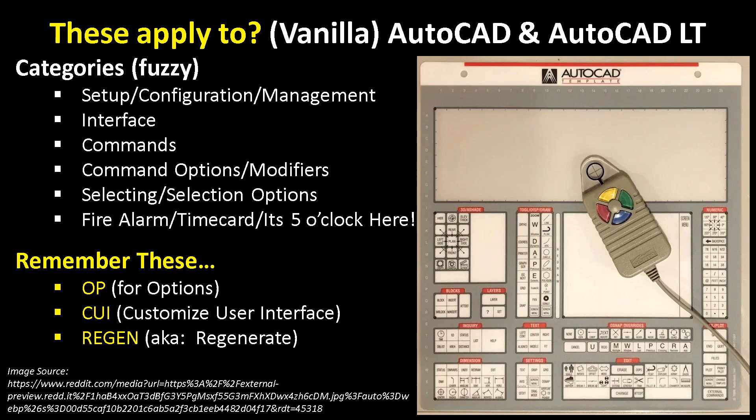And 10 extra points to anybody who can name what the picture is on the right, which, based on the previous poll question, I say the majority of our audience is going to get it.

All right, so let's get into the demo. There's a lot to cover, and I'm going to try to cover everything as best I can. I may move a little too fast to get it all squeezed in, and I may have to omit an item or two to fit us inside the hour, but there's a lot. So the first thing I want to talk about is the setup, configuration, and management aspect of it.

One of the things that comes up, not as much now as it used to, is arc and circle smoothness. You'll notice as I zoom in on some of these arcs, instead of looking smooth and contoured like they should, they're very jagged. If I zoom in on this one, it's a very jagged display. There's a couple of things that can clarify or rectify this situation.

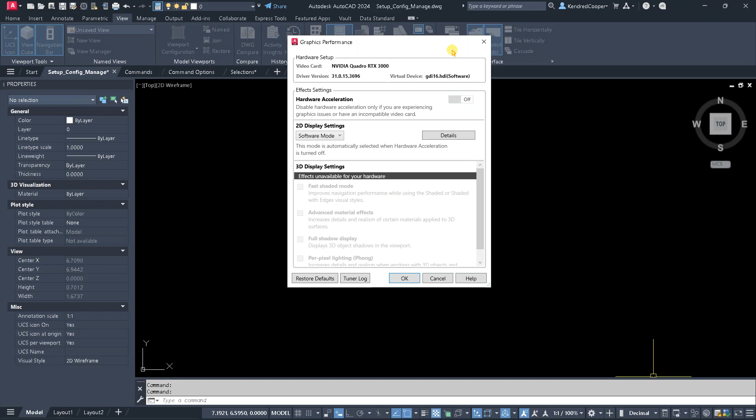One of the things is the graphics acceleration, or hardware acceleration. So if I go to graphics performance, I can turn on the hardware acceleration, and for the most part that will circumvent this situation. However, we've seen on some of the Intel cards that come with a lot of laptops that it tends to cause issues. The Intel cards are not a very good card to run any kind of CAD software on, so turning that on sometimes can cause problems.

So there's one option, but it may not be applicable. The other option is in the AutoCAD options. A couple ways to get there: OP and enter will take you to the options, you can also right click in the command line and go to options, or up in the application button at the bottom you'll see options. Any of those will get you there.

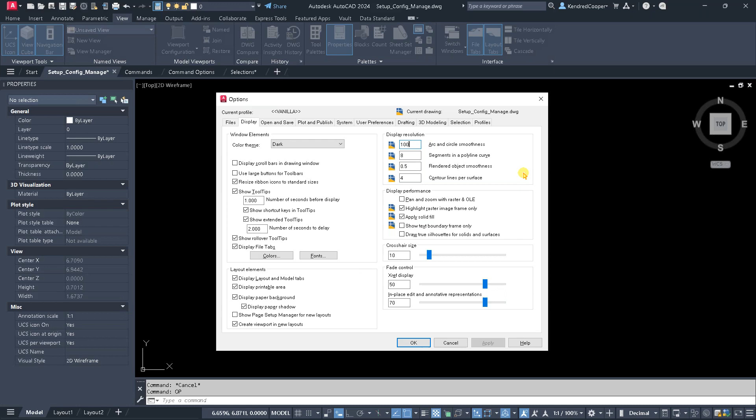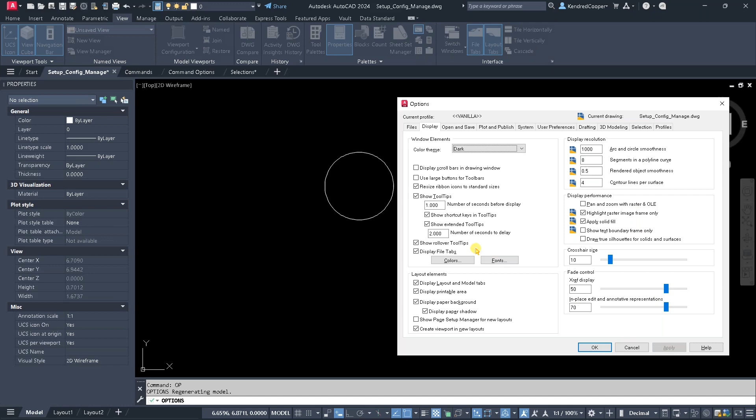So in the AutoCAD options, on the display tab, upper right-hand corner, there is a value for controlling arc and circle smoothness. The default for this value is 100, and 100 gives you what you see on the screen, the very jagged circle. If I change this to 1,000, or even as high as 10,000—I'm not sure if there's a limit, I've never gone higher than 10,000 or had a need to—even going up to 1,000 and hitting apply, you'll notice that circle smooths out tremendously.

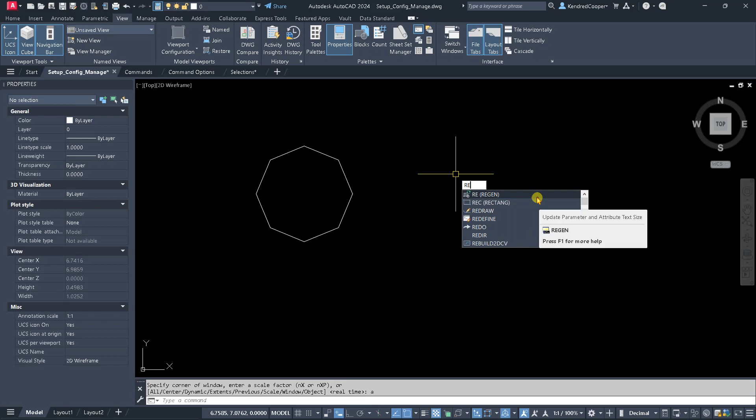So that's one option you might want to look at if you cannot use hardware acceleration. The other option, if I go back and tweak that down to 100, when I zoom in, the other control you have is to use the REGEN command. RE is your quickest way to get there, or you can type out REGEN. What it does is regenerate the graphics, and based on your current zoom level, it runs that smoothness count, that 100, at the current zoom level. So when you're zoomed in closer, you're going to have a smoother arc.

Zoom out and run a REGEN, it'll get jagged again. So there's a third option to tweak that, control that, and change it.

Something else to look at: let's say we're setting up our template, going with a new template. Maybe we've got 10, 15, 200, 2,000 drawings out there with various settings scattered around, all different. We're going to unify into a common template. Well, how do we get all these settings from other drawings into this template? What's the easiest way to do that?

Various ways you can do it, but probably the easiest is using the Design Center. On the View ribbon tab, on the Palettes panel, the clipboard icon is the Sheet Set Manager. To the left of that is the Design Center palette. The first time you launch it, it's a little slow, but after that it pops up really quick. The Design Center gives you a Windows File Explorer interface, so you can browse locally, on a network, wherever you need to look.

You can find a drawing, a specific file, and on that file you get access to some of its contents, such as the various blocks it may contain, or different dimension styles, layers, table styles, text styles, you get the idea. If I look in this particular drawing I'm working on, the layers I have are only center lines, column pillars, and dimensions. If I look at the various blocks, I only have two blocks. There's nothing else in there.

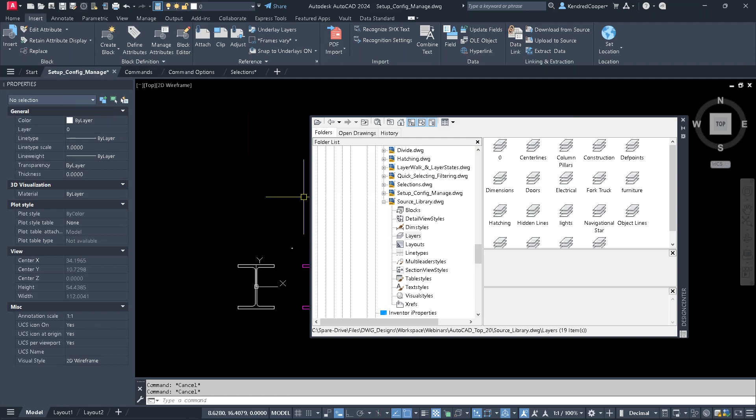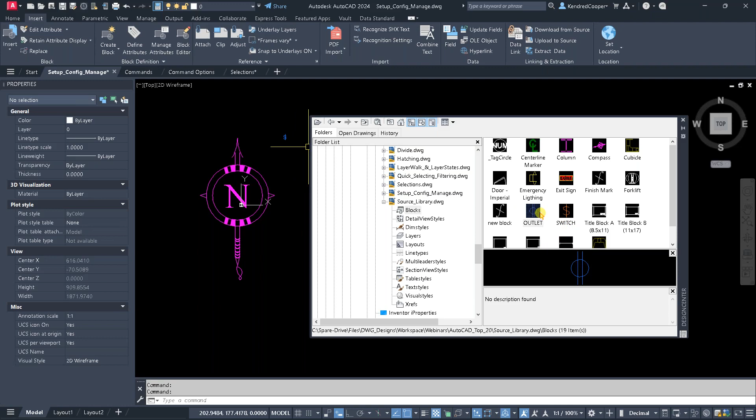So what I can do is go to this source library drawing, go to the blocks, and say, okay, what blocks might I want in my template? If I'm doing architectural, I'll want the compass or navigational star, and just drag and drop to put that in there. You might also need a center line marker, drag and drop that one. Light switches, outlets, let's see what else. Title blocks, there's another good one. We're going to need a title block, so let's drop that in there.

When you drop in a block, if it has any attributes, it'll prompt you for those. You don't have to fill them out right now, you're just getting that block definition embedded into your new drawing. So the Design Center allows that drag and drop capability for any of these items.

Same thing goes for layers. Maybe I need a viewport, text, hatching, hidden lines, object lines, construction layer. Anything else I might want to throw in there? Yeah, that'll be enough. All I do is drag and drop, and they now become part of the drawing I'm looking at. So my layers have expanded, and if I look at the various blocks I have now, I've got a lot more block geometry available. The Design Center is a very handy tool to essentially rob from other drawings to get them into here.

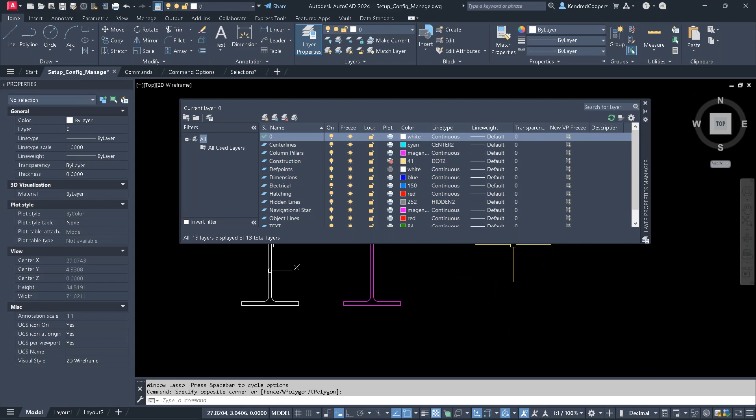Looking more at the layer situation, let me clean this up a little bit. When you're setting up or configuring your layers, one capability a lot of users aren't aware of is the control you have over them. You've got your name, whether it's turned on, frozen, locked, color, line type, things like that. But you can also set a layer to not print.

Good examples of when this is applicable: construction lines. You don't necessarily want those printed out, right? If they do accidentally print, you could set it to a very minuscule line type, like a dotted line, so it doesn't show up well. Viewports are another example—you'll have a viewport border if you're using paper space, but you don't want it to plot. All you have to do is click on that printer icon, and that keeps that layer or any objects on it from plotting. You'll still see them on the display, you just won't see them on paper.

Let's go back and look at that title block situation real quick. Here's another item that comes up. When I drop in that title block, with block geometry, you can configure it to have attributes. You'll notice some of these attributes, I can plug stuff in. So say 1/16 of an inch equals 1 foot, I can type that in. Other items, however, are kind of grayed out. I can't directly type into them.

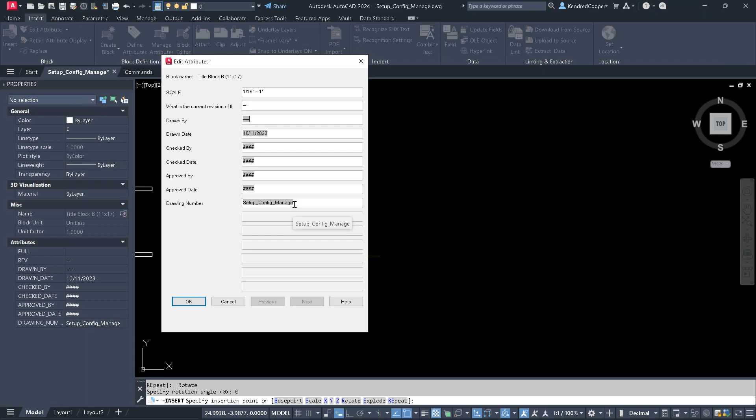I can double click and get to what I need, but these are actually pulling from the drawing fields. That's something you can do with any piece of text, it doesn't have to be in a block object, but a title block is probably the most common way you'll use this. When I say okay and zoom in down here, you'll notice a lot of these fields are highlighted gray. The drawing number already has the drawing name in there. There's no title description, no drawn by, or anything like that. These items are being pulled from the drawing fields.

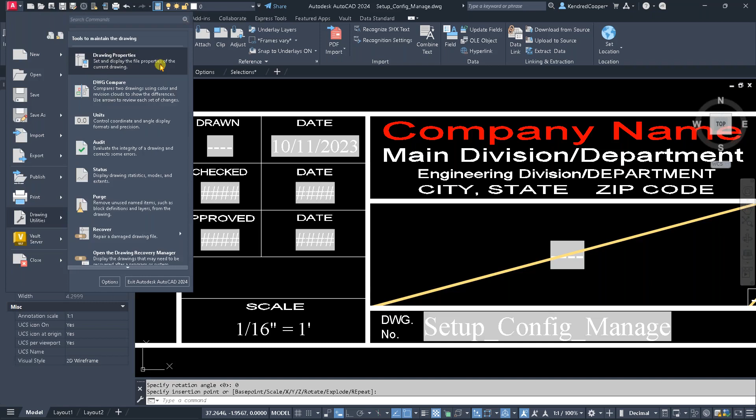Where do you get those? If you go to the application button, the big A in the upper left, come down to drawing utilities, go to drawing properties. In the drawing properties, these are the fields you can use. You can populate these pieces of metadata and pull that into your drawing.

So title, subject, author, I'm just going to put my initials in here. Comments, we're going to call it the setup drawing. Statistics or custom, you can pull any of that information into your drawing as a field, and you can add your own, that's what these custom ones are. Various materials, alternate materials, maybe where you buy something from, like a fab shop that's making it, or even an alternate fab shop, vendor, supplier, things like that. You can add whatever you want to add.

When I say okay and type REGEN, notice the drawn field populates and the title populates. Again, they're pulling from those fields associated with the drawing properties.

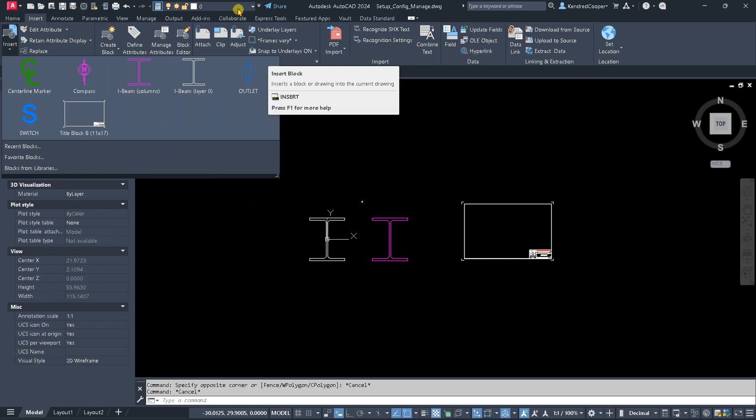Continuing on with drawing properties, or really drawing utilities. If I go back to the drawing utilities flyout, there are a couple other commands in here. One is purge, which allows you to clean up your drawing. You might have a drawing that's mostly what you need, but there's a lot of bits scattered around that you don't need embedded in the drawing. There might be 15 or so blocks you don't need, or 20 or so layers you don't need. How do you clean all that up efficiently? That's where the purge command comes in.

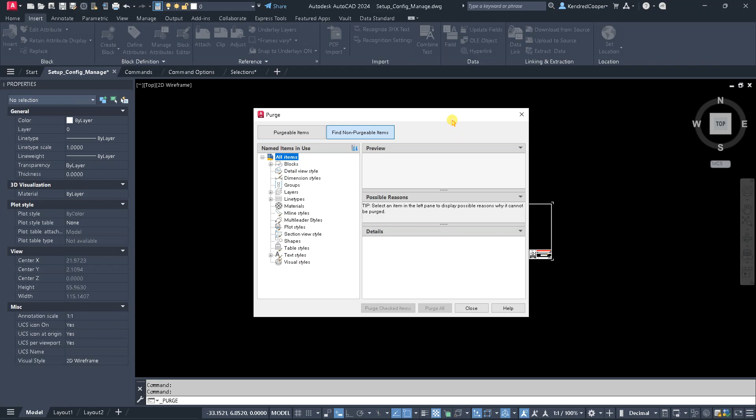With purge, you have two options: you can show the items you can purge, or show the items you cannot purge, kind of a good status check. The reason you won't be able to purge an item is because it's used somewhere out here in the drawing area. If you look at the items you can purge, it gives you a nice breakdown of what you can get rid of, various items like blocks, layers, things like that. You can individually pick and choose what items you want to get rid of, or you can say purge everything. So you can either purge what's selected or purge everything that's not used, a very handy way of cleaning up your drawing.

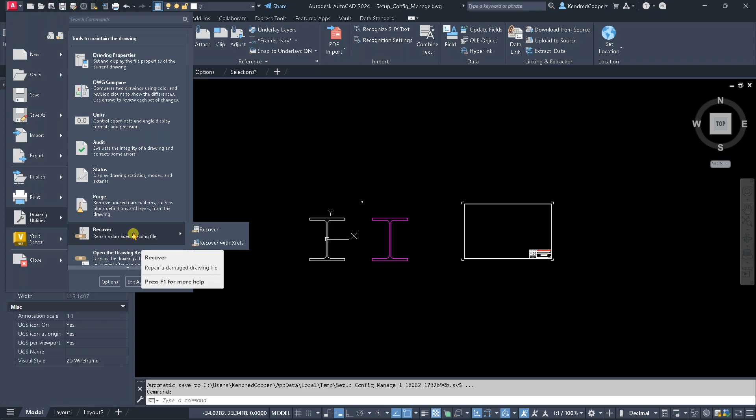Back to drawing utilities again. If you've got a drawing that's damaged, you try to open it and it says there are problems, can't retrieve all of the database schema, things like that, you can recover most drawings using the recover utility. When I choose recover, come out here and grab a drawing that has some issues with it. When I open that, it processes the drawing and gives me some feedback. Did it find any errors? Did it fix any errors? Were any of the objects erased? There's a ton of stuff in the code that this recovery utility looks for. When I hit close, it will open it up.

Now, if the file was damaged severely, you could actually have items that are missing, like part of a wall that should be there, so you have to go in and fix that. But you'll recover the bulk of your drawing.

Before you get to that point, you can also run a health check on your drawing using the audit utility, also under the drawing utilities flyout. The audit works by prompting you, do you want to fix any errors? So if you just want to see how many errors it finds, or if it finds any at all, or you could have it automatically fix them. The feedback for the audit is in the history window. If you press F2, that brings up the command history for AutoCAD, and you can see the results of that audit. For this particular one, no errors were found, so no errors were fixed.

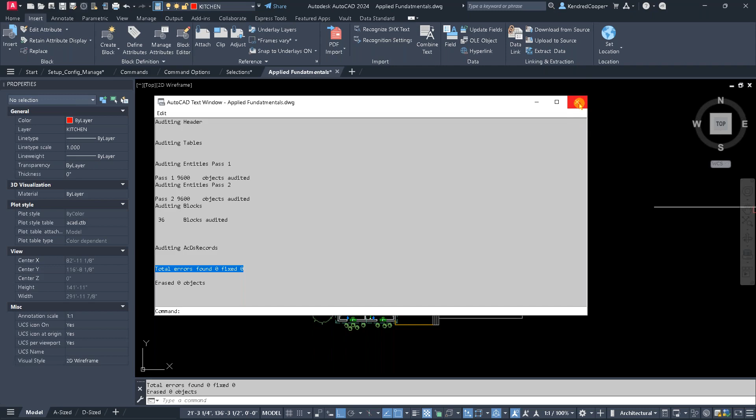Another very handy utility in a multi-user, especially a network situation: how many times have you opened a drawing and AutoCAD says this is read-only, I can't give you write access to this. Somebody has it, but it doesn't tell you who. It just says it's read-only. How do you find out who has that drawing so you can go talk to them and tell them to close it, because you need to make a change to it?

There is a command called WHOHAS. With that command, you browse to that drawing, open it up, and it will tell you if someone has it open and is preventing your access. It'll tell you that user listed here. Nobody has this one open, so it says user unknown.

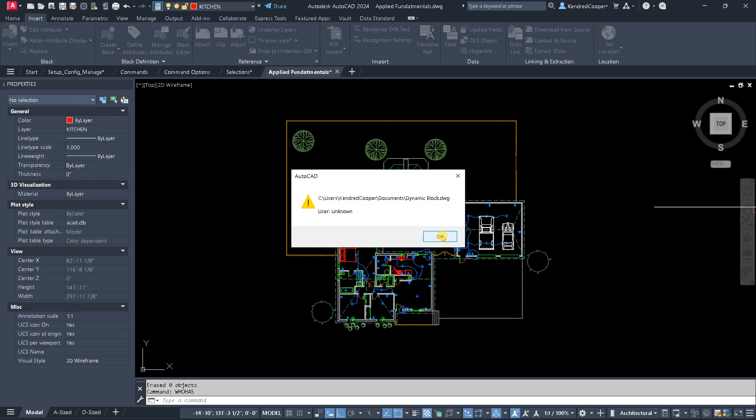All right, now we're going to the interface. That was the setup and configuration portion of it. We're going to look at the interface options.

One thing that comes up is in the options on the selection tab, you have control over your pick box size. This can actually make life a little easier or a little more difficult. I've seen a lot of new installs show up with a very small pick box, or somebody changed it to this and didn't know how to change it back.

It was done accidentally. What this controls is, when you start any command that has a select objects prompt, something like erase, move, or copy, you get this teeny tiny little select box. I can't do anything with that. I can't really see what I'm picking on or what I am on.

So one of the first things you can do is come back into your options on the selection tab and resize that pick box to something that's a lot more comfortable for you. Now when I start the erase command, I get a much larger pick box. I can actually see what I'm picking and where I'm selecting.

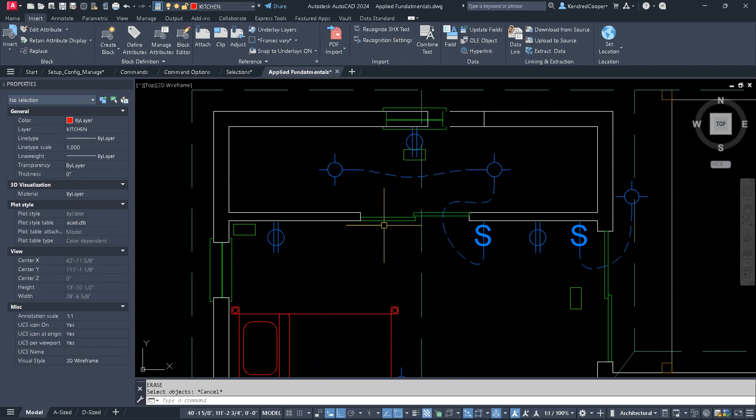The other thing with the interface is a workflow situation: don't work 10,000 feet up. If you need to work with fine details, get in there and zoom in. The nice thing about AutoCAD is zoom is a transparent command — it works inside and during every command. You can pan around, zoom in closer, zoom out, and you're still in your command. So try to get closer, get that model geometry bigger so you can select it and work with it more easily.

Another thing with the interface is accessing your object snaps. Hopefully everybody is familiar with creating lines, circles, rectangles and using running OSNAPs to snap to the endpoint, midpoint, or center of geometry. Those are controlled and assigned through your status bar icons. Across the bottom, one of these icons is titled Object Snap. If I right click on that, every one that has a check mark is your running OSNAP.

That means whenever you start a line command or a circle command, the running OSNAP is what AutoCAD is looking for — those selected types of snaps: endpoint, midpoint, center, intersection, and things like that.

There's also snap overrides, which come in handy in a situation like this. If I start a circle object and want to attach a line segment to one of the quadrants of that circle, when I hover on the circle the only thing it selects or highlights is the center. I don't need center, I need the quadrant. So I could come down here and add it to my running OSNAPs, but that can throw off my workflow a little later.

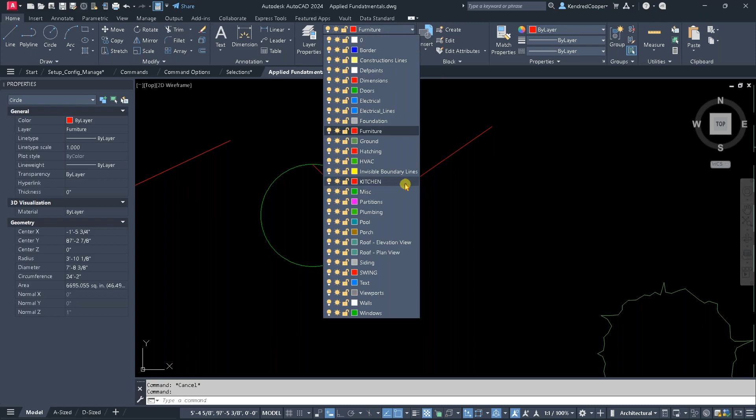If I want to see what layer this object is on, I can do a grip select. Maybe I want to change it to a different layer. Come back over here to the home tab, pull that down and put it on the furniture layer, or maybe miscellaneous. The problem is you could be on the insert ribbon or the annotate or any one of these other ribbons using these commands. So to go to another ribbon tab and go to another section, there's travel time involved.

So you've got some downtime there. To make it easier, you can take that pull down, right click on it, add it to your quick access toolbar, and that puts it up here at the top. That way, no matter what ribbon or command you're on, you always have access to your layers pull down. Streamlines the workflow quite a bit.

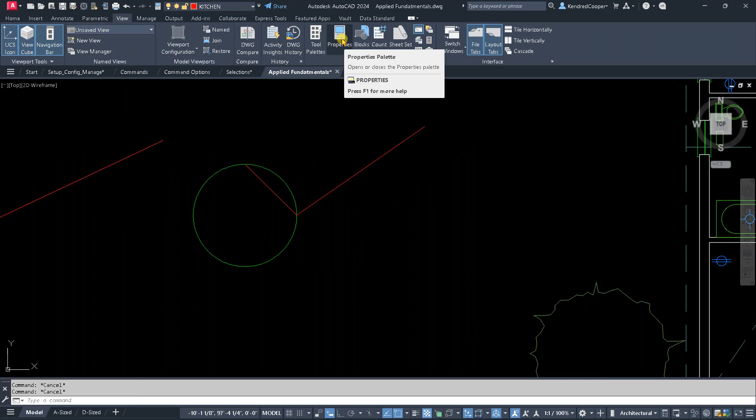Another streamline capability is using the properties palette. Now, if you don't see the properties palette, you can go to the view ribbon tab. On the palettes section, there is a properties palette icon, brings it up here. You can float this, you can dock it left or right. You can even float it to another screen if you have multiple monitors. The properties palette is extremely handy because it gives you a ton of information about whatever you have selected.

So if you have a line segment selected, for example, it tells you what kind of object, general behaviors of that object, and geometric information about that object. So I can tell the length of that line, the angle. If I look at that circle, same thing here: the center point location, radius, diameter, circumference, area, and layer information. Depending on the type of object, controls what kind of information you get.

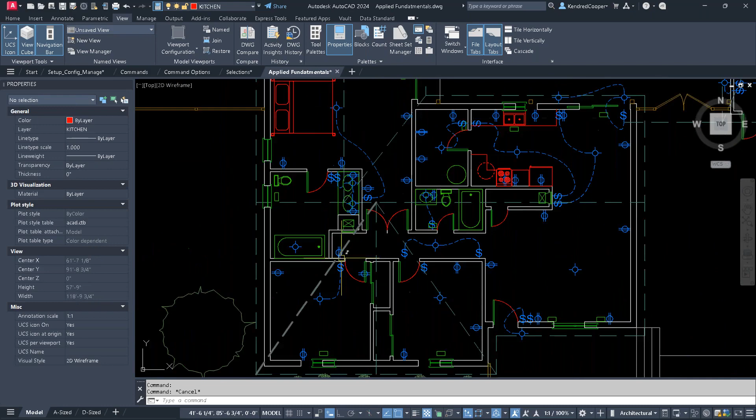If I select a block object, for example, it tells me it is a block reference object, gives me information about that. If I select a piece of text, which I don't even think I have anywhere on this drawing - I don't, so everything in here is blocks and line geometry. If I come back over here to this guy, when I select a piece of text, it tells me layer control, the text information. So I've got the contents, the style, annotative or not, even the text height, which I can dynamically control from here, as well as geometry information associated with that text.

Let's see, what else do we got? Oh, layer groups. Let's look at some layer groups real quick. So one thing with layer groups - talked about layers a little bit with the layers property palette - you can create a set of group filters. There's various reasons you might want to do this. What I'm looking at here is a plant layout drawing. Well, what if I wanted to only see the layers that make up the actual property structure? So I don't want any machines, personnel, product, that kind of thing.

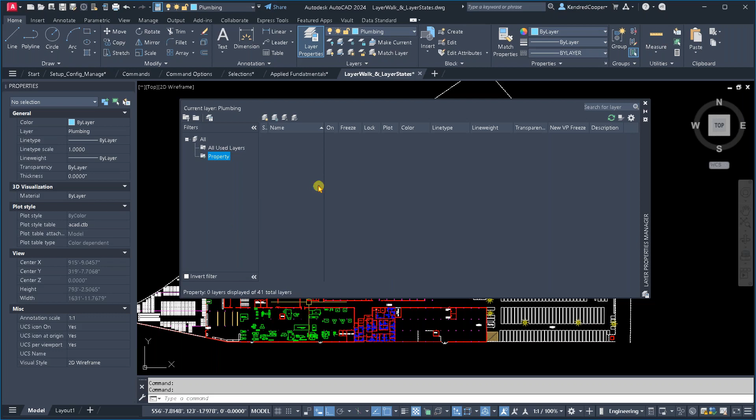So I'm going to make a new layer group filter. I'm going to right click on all, new group filter, give it a name. I'll just say property, keep it kind of generic. So there's nothing in here yet. I'm going to go back to the all filter or the all used, either one you want to work with. And I'm going to use the control key and select the different layers that represent the property structure. So that's going to be things like building walls, column pillars, concrete walls, fence lines, and light poles. And I think that's probably - well, we are looking at property, so I'll go ahead and include the navigational star.

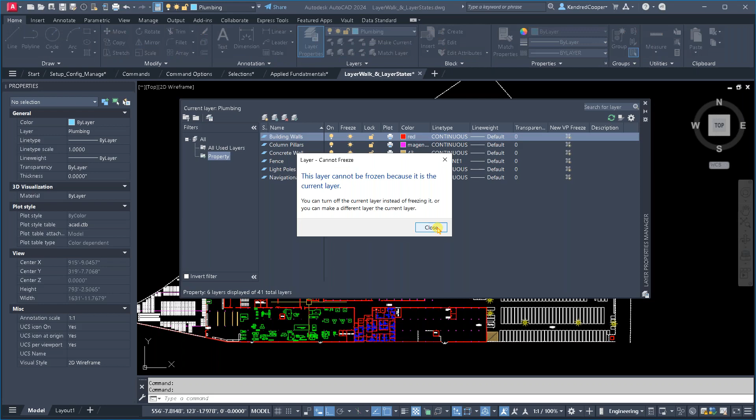So with those layers selected, all I need to do is drag and drop to that property layer group. Now, when I go to that layer group, I can right click on it, choose isolate group in all viewports. It's going to give me a warning about any layers that can't be frozen or turned off or anything like that. Go ahead and say okay, close the palette, and that's what you get. Those are the layers from that group. Basically what it has done is it has gone through and frozen all of the other layers in your layer manager. You can get them all back by simply using thaw all layers, and that brings them all back. Your layer group filter is still there if you ever need to use it.

The interface across the bottom, the status bar - there's a lot of things down here. And we've seen some new installs in various versions where for whatever reason, some of these items might not show up.

It could be because it was configured differently from an IT deployment, or antivirus might have blocked some DLL from registering, and it just turned off that item.

You've got a lot of stuff down here - your coordinates, your various function controls like OSNAP, dynamic input, annotative capability, workspace control. If you want to make sure everything's turned on, or if you want to turn a few things off, click the 3 horizontal bars in the bottom right-hand corner. That brings up a menu allowing you to pick and choose the items from those icons. If you think you're missing something, make sure everything is checked, or if you want to clean it up and get rid of things you don't use, you can turn those items off here.

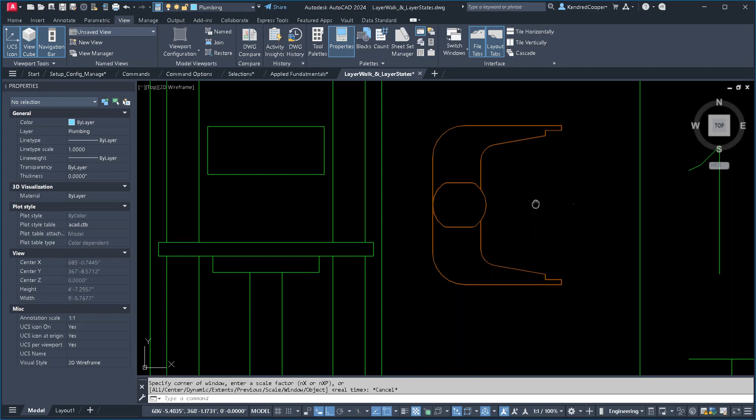One particular workflow a lot of users don't know about is you can double click the middle mouse wheel without rolling it. It feels a little odd the first few times you do this, but do it a couple of times and you'll get the hang of it - it's an instant zoom extents, getting you all the way back out.

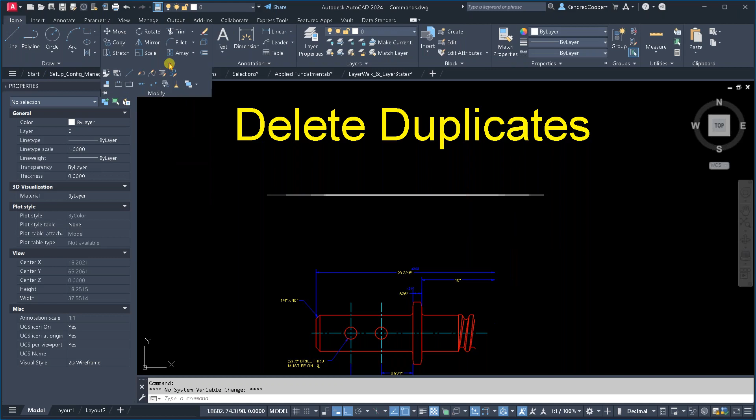Now we're moving into different commands in AutoCAD you may not be aware of. One command I had to use a lot in a previous life is delete duplicates. We've probably all seen this situation where you have a line on top of a line on top of a line a thousand times. How do you get rid of all those duplicate lines? On the home ribbon modify panel, there's a broom, or what looks like a broom - that's your delete duplicates command.

Let's look at what we have. Right here, this looks like one line, but if I grip it, the properties palette tells me there's 12 line segments on top of each other here. How do I unify all those into one? That's the delete duplicates command. So I'll just select all of those and press enter.

You can unify based on color, line type, things like that, and control a tolerance - how far off are they from each other. When I say OK, it now unifies all that geometry into one line. When I say unify, it actually gets rid of the other pieces of geometry.

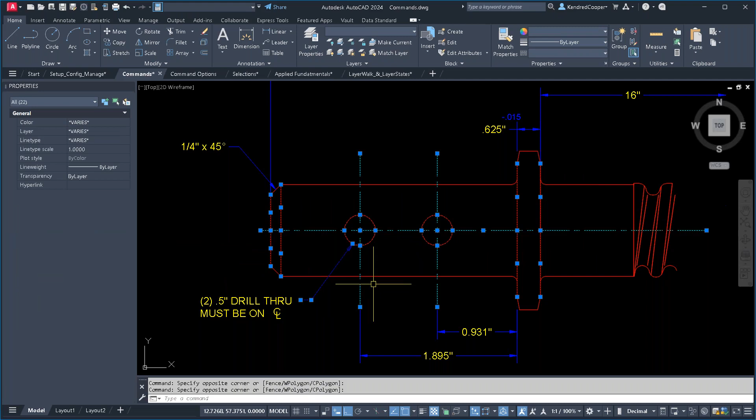So in a view situation like this, there's two lines right there - one going all the way across and one only going halfway. That takes place all across the midline of this view, so delete duplicates can take care of that. If there are no duplicates, no harm, no foul - nothing is done to that object. So now there's only one line there, one line there.

The sketch command - boy, did I use this a lot in my past life. It's a very old command, probably one of the oldest commands I'm talking about. What it allows you to do is freehand sketch any shape. You're not using lines, arcs, circles - you're just moving your mouse and it's creating geometry where you move it.

The sketch command does have a tolerance value down here. Let me turn on dynamic input so we can see that. I don't think there's an icon for the sketch command - I've only known it to be a keyboard command. There may be an icon, I've just not seen it.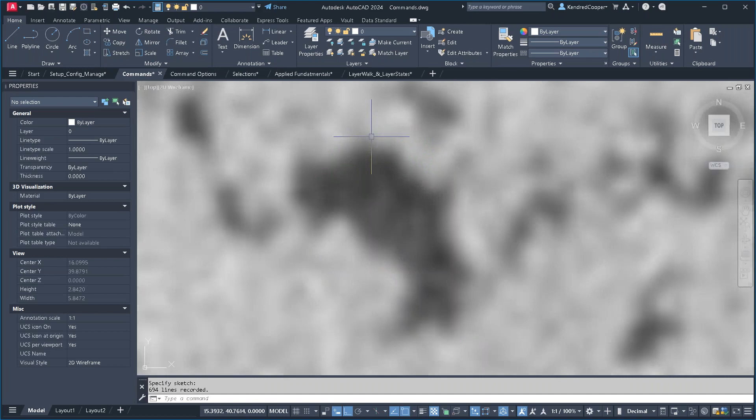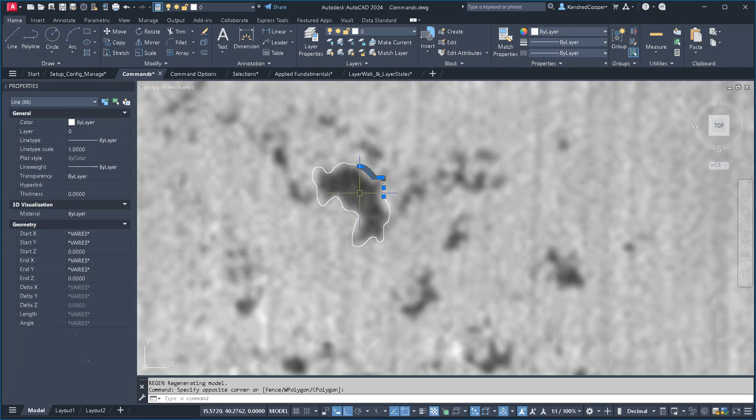Now you can connect the endpoints, or you can zoom in and manually do it. I prefer to use this method. So there's my outline. Right now, all it is a series of line segments.

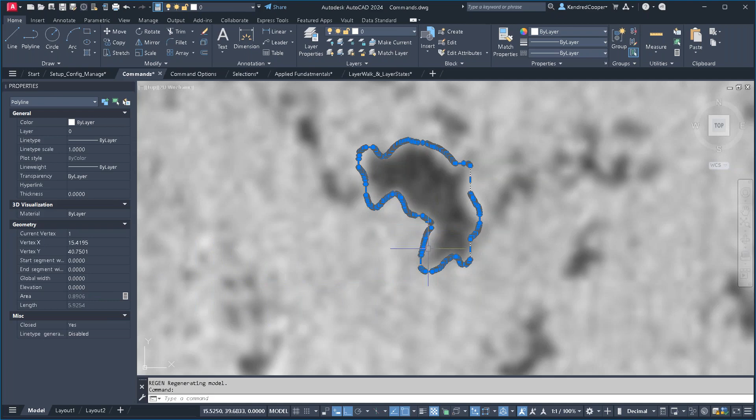But I can use the Polyline Edit command, pick one of those segments, convert it to a polyline, and choose to join it to the other segments. It creates a closed polyline object that I now get an area for. So I can tell it's 0.89 square inches in this case, for that defect area.

Another command is construction lines, or X lines. In here, I've got a construction lines layer. It's a very pale color and has a dotted line type. That layer is also set to not print. But if I did accidentally print it, because it's a pale color and a dotted line type, if I try to print it in color, it's probably not going to show up.

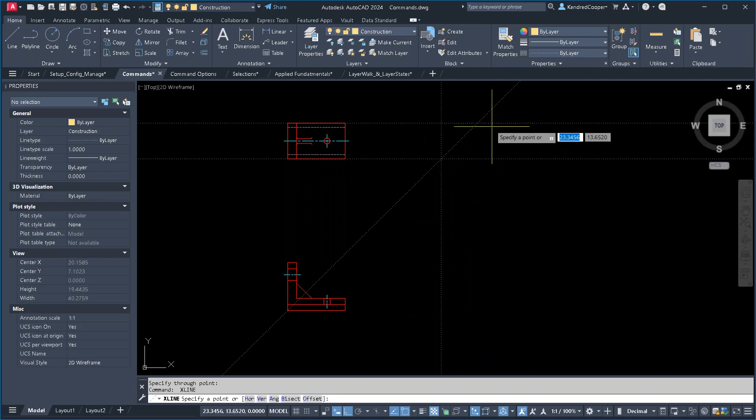But construction lines help you go back to the old school drafting view layout, if you will. So you want to line up your views using construction lines. You can lay out one construction line at 45 degrees, then use construction line to lay out your other view orientation and your other view size.

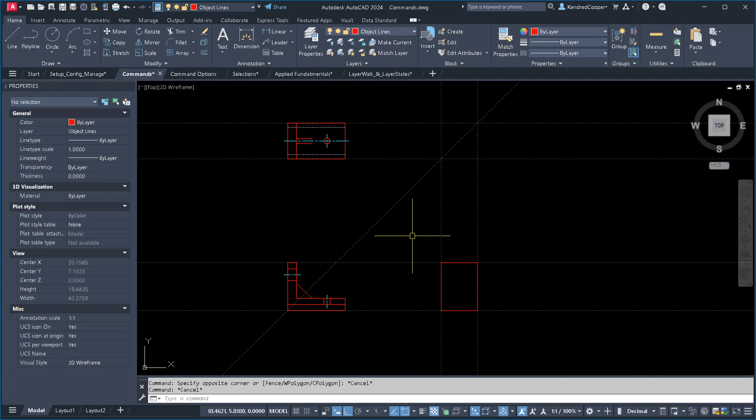Now I can just switch over to my object snap, use my line command, reference the intersections, and now I have the correct height and width from my other two views. Then get rid of those because they do clutter up the display, or at least turn that layer off.

Now let's switch over to an old school method of inputting the geometry. So you have dynamic input, which puts the command line at your cursor for most commands in AutoCAD. If I create a line segment and want it at a particular length or angle, this is what dynamic input allows you to do, is cycle between those values.

There are a handful of commands where dynamic input can sometimes throw off the picks and clicks - not many, just a handful. Plus, if your habit is to not have it turned on, this can be a little tricky to do something like this, because with dynamic input turned off, you've lost that feedback. So how do I tell it to go 207 degrees?

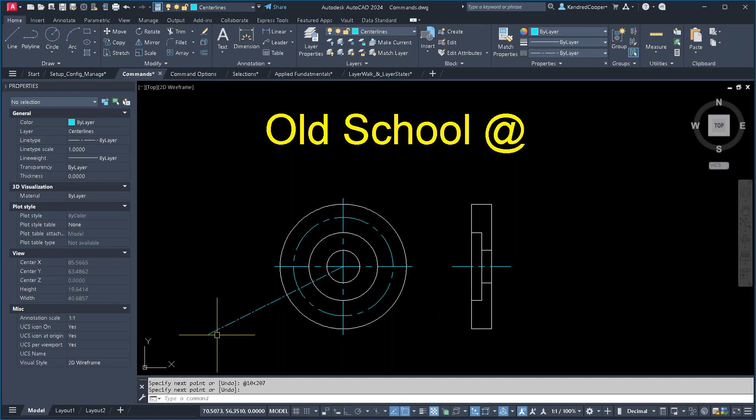There's a very old school way of entering that information. First, you start by saying 'at' - use the at symbol - and that basically says at my last point, which was the center point I picked. Go whatever units, mine is going to be 10. Then use the less than symbol, which says at this angle, or angle control. So now if I type in 207, I get that line 10 units long at an angle of 207. That's the old school way, before dynamic input was created.

Going back to layers real quick, let's talk about LayerWalk. In this situation, with this very massive plant layout, how do we know what is where? There's quite a few layers in here. Actually, that's not all of them - let me get back to all of them. There we go, so there's a lot of different layers in here.

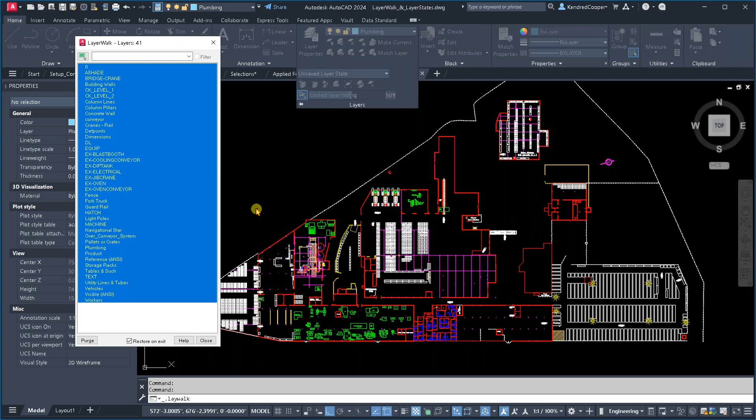And how do we determine what is where? You can manually go through here and turn these off and freeze them, and do it the old school way, yes, but there's an easier way. If I expand the layers panel, there's an icon down here with a set of footprints - that's your LayerWalk.

What LayerWalk allows you to do is it brings up this interface to say, okay, all of these layers are selected. If I select building walls, that's the only one that is shown. If I select, using the control key, building walls and column pillars, those are the only two layers shown.

So the way the command works by default is when you close it, it returns all the layers back to what they were - it restores them to the previous state. But there's a checkbox that if you turn off, it will keep whatever you have selected. So if I do building walls, pillars, let's do light poles and fences and concrete - that's part of it too.

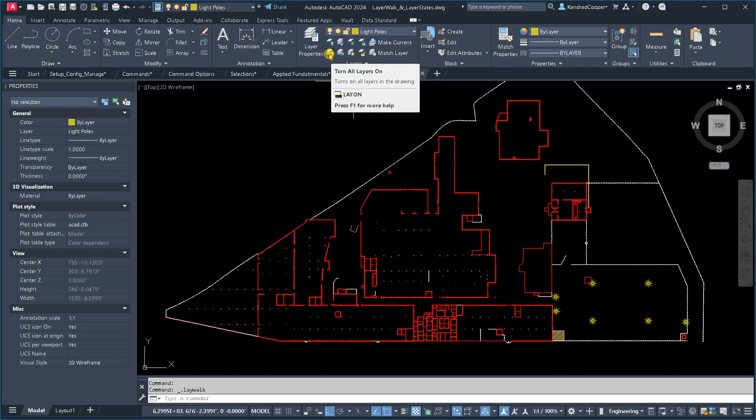So down here at the bottom, if I uncheck restore on exit and hit close, it prompts me and says, are you sure you want to do this? You could have some layers that can't be turned off or frozen. Continue - it leaves you with that display. Basically what it did to all of those layers is it just turned them off. The way you get them back is there's a handy little icon right here that turns on all layers, and that brings everything back.

Another command is the divide command. What it will do is take your object and break it up into however many segments you want. I like to do this with layer 0. Divide, I believe it's under Modify, but I usually just type it in.

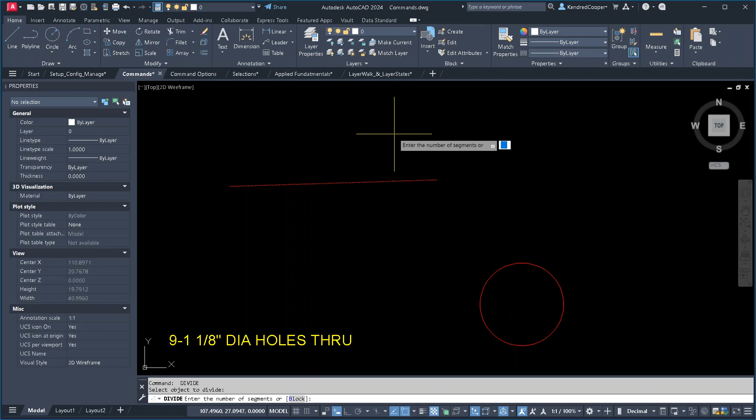With the divide command, turn dynamic input back on real quick. When you select your object, it's asking you how many segments you want. If I want this line segment divided into 4 segments, it puts a point node at each segment location, but it does not actually break up the geometry. The line segment as an object still exists as a whole. It doesn't break it up, so it's not a combination of the break command. All it really does is put these node points at those locations.

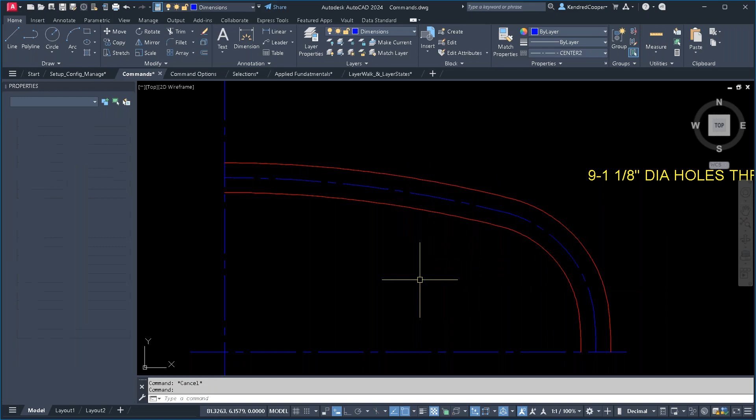It works on circles and arcs as well. Plug in your number of segments. Now when you get to something like this, you've got 3 arcs making up that curvature. In the center, I've used Polyline Edit and connected all 3 of those arcs into one contiguous polyline. If it's one polyline like this, you can still use the divide command and break it up into 10, 8, 12, however many segments you need. These are equal distance segments between those node points.

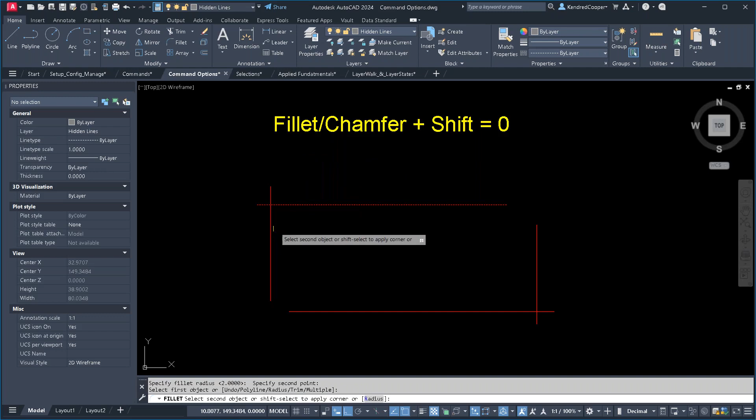All right, now let's look at some command options. Fillet and trim, or fillet and chamfer, here's one that goes missed a lot. In a situation whether you're using fillet or chamfer, both function in this manner. If I start the fillet command and plug in a radius, whatever that radius might be, I apply my radius, choose my objects.

Now in this situation, what if I needed to just bring these to a sharp corner? You can use a radius of 0 or a chamfer distance of 0, that works perfectly fine. But what you just did is basically erase the previous setting you had. What if that's a setting you needed to keep? Maybe it's a unique radius or a unique chamfer distance you needed to keep. By changing that radius or distance value to 0, you just blew that away. Well, there's a way you can keep it. Right now it's keeping that previous value I had because I used undo to get back to where I was, so it's got that previous value.

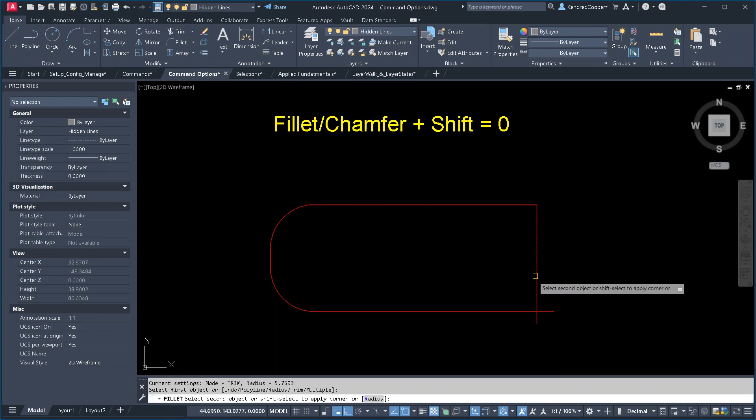I can keep that value if I hold down the Shift key. Holding down the Shift key and selecting your geometry defaults to a temporary value of 0. As soon as you complete that command, come back in here and restart, your original setting is still there. So that works in both the fillet and the chamfer command.

Now we're going to talk about trim and extend, and this is a good command to show the fencing. With trimming, obviously I want to get rid of these pieces up here, so I can just use a fence line, come across, select all of them, they're gone. Then I have to come up here and hit extend and do the same thing across the bottom. That's fast, but it's not fast enough. So depending on which one you start does not matter - you can start with trim, you can start with extend.

Invoke that operation, hold down the Shift key, and now it swaps to the other command. So if you're in trim, you hold down the Shift key, trim becomes extend. And going the other way, if you started with extend, hold down the Shift key, extend becomes trim. That's a lot faster than having to switch to another command.

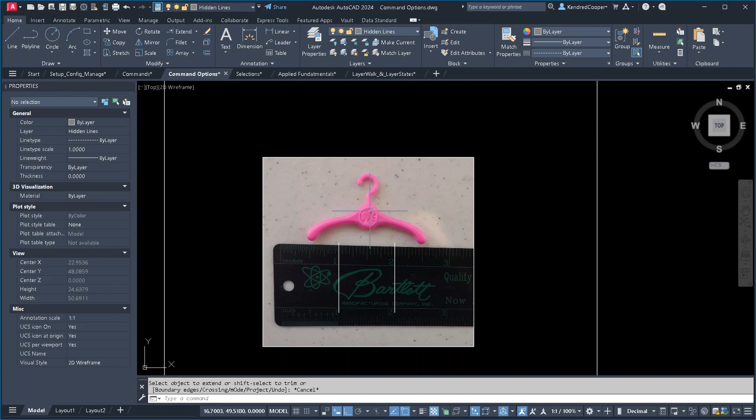Let's talk about scale reference. I have a 3D printer, and my daughter has asked me for some additional clothes hangers for her Barbie dresses. So I've gone into production mode - I've got to draw out that shape so it fits right and she can use it. How do I get this to the right size? This is obviously just a picture taken with my phone. I've got the hanger, I've got a ruler for a size reference. It's a little bit skewed, but it'll work.

And if I run a distance calculation, it now shows me the distance is about 4.6 inches. Okay, that's way too big. I need to get this scaled accordingly. So what I've done is I've put 2 lines right on top of the inch marks of the ruler, and I'm going to scale it down.

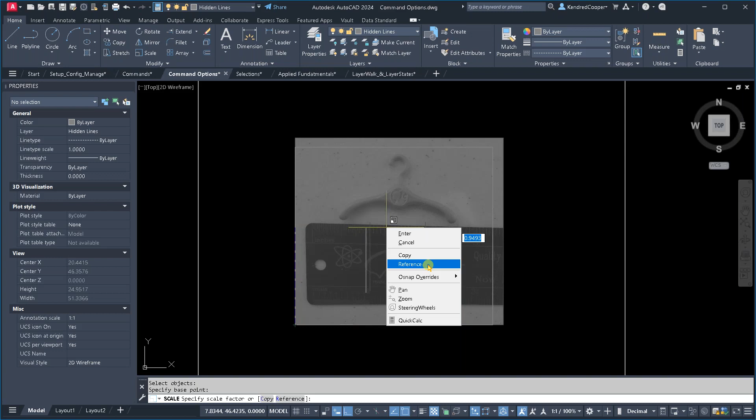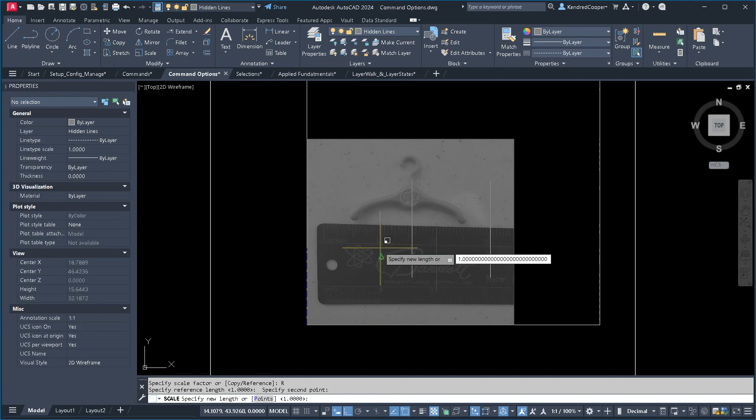So when I use the scale command, I pick my base point. Now at this point, I could try to run some math calculations and figure that out, or I can simply right click and choose reference. My reference, I can either type in a number or I can pick objects. So I'm going to say my reference distance is the distance between these 2 endpoints, the 4.6 inches. Now what's my new value for that? 1.0, and I always add a bunch of zeros to eliminate any kind of rounding error.

So it scales it down. Now when I come in here and run a distance calc, we're at 1 inch. The same thing can be done anytime you're inserting blocks that you might have downloaded from a website. They could come in too large or too small. You know, a standard bathtub we know is 5 foot, so I need this guy to be 5 feet.

Scale command is going to be used again. Select the object, select my base point. Now at this point, what I'm going to do is what I did previously. I'm going to right click, choose reference. My reference is going to be that vertical edge of the bathtub, so I'm going to use endpoints and pick that edge.

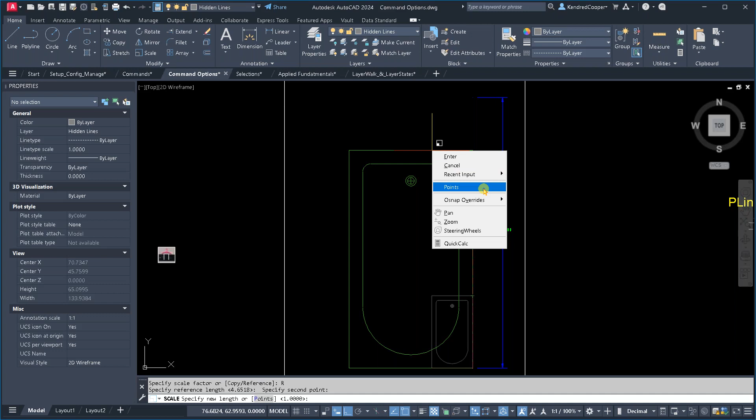Now here's where it changes from previously. I'm going to right click again and choose points. It would make more sense if it said match points, but when I choose points, I can now pick 2 additional points, and it's going to match the previous point selection with the new point selection. I'm going to say from that midpoint to that midpoint, and now it's dead on 60 inches.

Similarly, there's an option for rotate that works much the same way. So with rotate, if we need to rotate this cubicle to have this long wall of the cubicle match up with this angular wall of the building, yeah, you could take dimensions and get those numbers and do it that way. Or with the rotate command, go ahead and pick your objects, pick your base point.

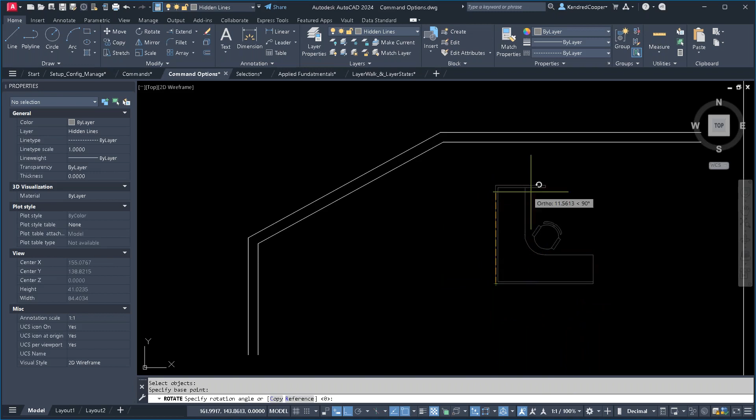Now at this time, I'm going to right click and choose reference. I'm going to pick 2 points on my geometry that define my reference angle. That's going to be the endpoint down at the bottom and the endpoint up at the top. You'll see it changes your anchor alignment for the rotate.

Again, like we did a second ago, I'm going to right click and choose points. Now I'm going to match it up with the points that I want it to align with. So as I move it into place, they are perfectly aligned.

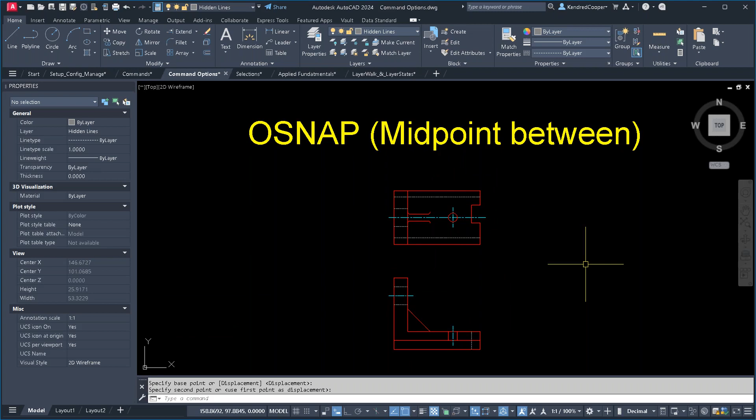One of the OSNAPs, or object snaps, that tends to go unused but is incredibly handy is midpoint between 2 points. So let's say I needed to move this particular view and I needed to reference the midpoint between these 2 points, but not over here. I don't need that midpoint. I need it out here on this edge.

Now I could use object track like you're seeing. A lot of users still aren't very comfortable using object track, but it will work. The other thing you can do is use Shift right click, mid between 2 points. When I choose that and just choose the 2 endpoints, it is now anchored. Let me turn off dynamic input so you can see it clearly. It is now anchored at the midpoint between those 2 points in space, and now I can relocate it for proper alignment or things like that.

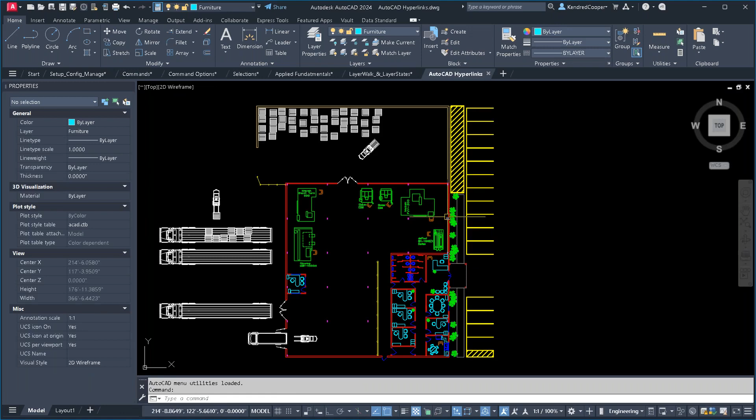Hyperlinks. Let's talk about hyperlinks. Any object in AutoCAD can have hyperlinks associated to it, whether it's a block, a piece of text, or just a piece of simple line geometry. When I look at this text and look at the properties of it, you'll see there is a hyperlink field. I'm going to hold down Control and click on that text, and it opens up whatever that hyperlink was. In this case, it opens up another drawing.

In the case of something like a shop layout, you can actually use hyperlinks and link to a manufacturer's website. It gives you details of the machine, a brochure for the machine. You could also, bring back my AutoCAD here, link to another file, like you saw it linked to a drawing file. This time I've linked it to a company spreadsheet that gives me the machine, some capabilities of the machine, and what jobs might be run on that machine.

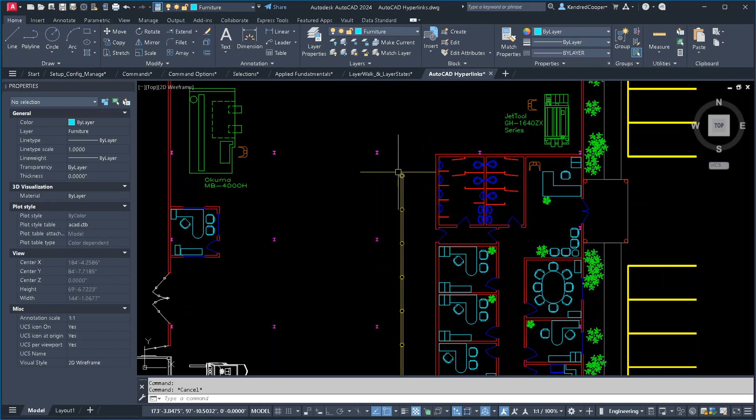The way to build a hyperlink is you simply select the object, whatever that object is. In this case, I'm just going to zoom in and use one of these lines of the guardrail.

Select that object. Over in the Properties palette, on the hyperlink field, just click the Edit Hyperlink box and you can link it to a file or to a web page. In order to activate that hyperlink, you simply hold down the Control key and click that geometry, and it will open that hyperlink in either another Internet window, AutoCAD window, or the other application, in the case of the Excel file.

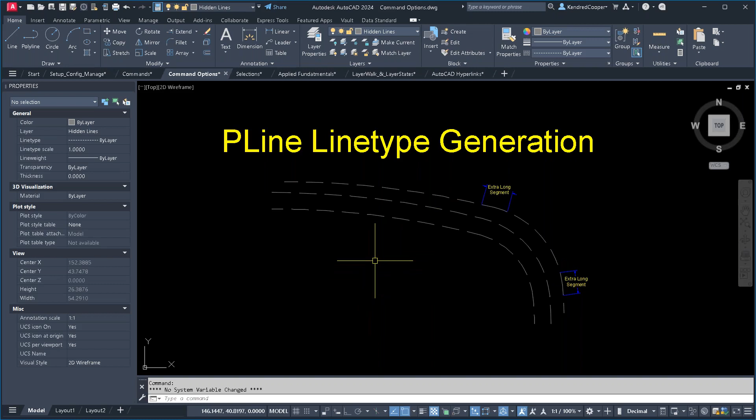Now let's talk about Polyline line type generation, another command option. So we've got 3 different hidden lines here, and you'll notice the hidden line dash length. This particular one here is just a regular arc object. They are not connected, so you've got this incredibly long hidden line dash where they connect. So at the endpoints, it does a miscalculation on the line type.

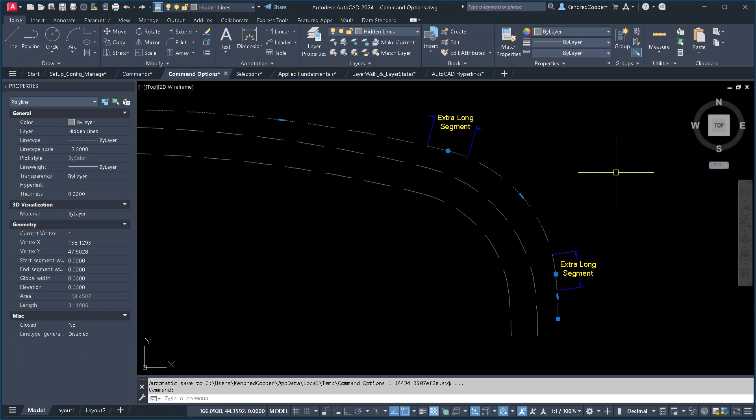If you join these into a polyline, the default option you'll get is this one on the outside. With this particular one, you still get that longer dash because there's an option in the polyline properties that has to be turned on. That's what this one has here. When I do a grip edit on that and go to the Properties palette, over here at the very bottom, there's an item called Linetype Generation. It's enabled. If I disable it, you can see, cycling between it, the change. So with it enabled, I get a more accurate line type generation, and with it turned off, I don't.

One more quick section here, and we're going to be ending it out. Selections.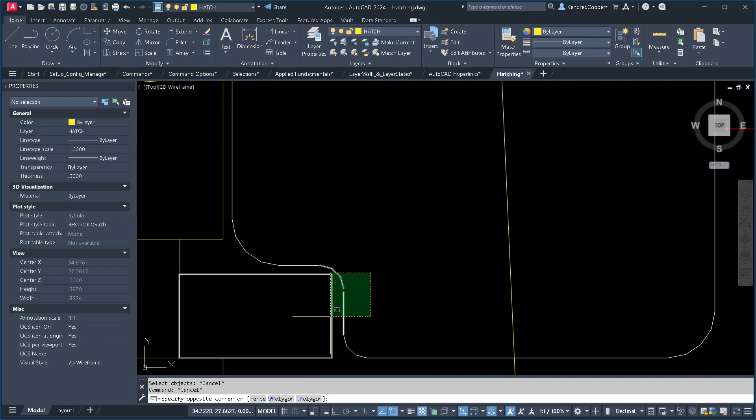But what you can do manually is make a grid. Just break your area up into different quadrants, different sections, and you'll notice real quick, where's the problem? It identifies that area. So now you can zoom in and say, okay, what's the problem? Well, it's right there, you've got a gap. So now I can just extend that up, close that gap.

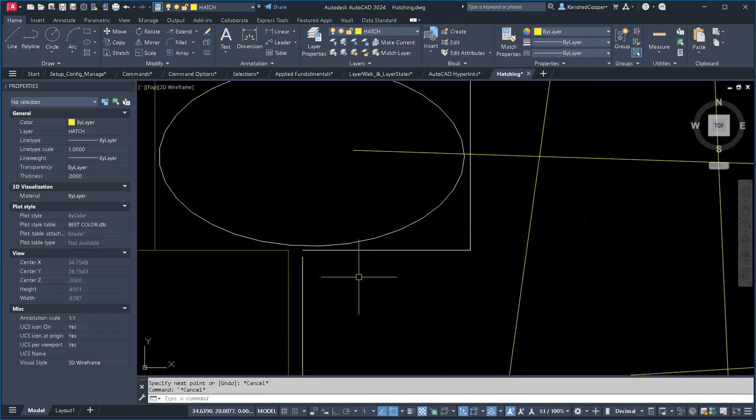Let's check the other one, make sure it's still working. That works, that works, that works. Another problem there. So there's two problems in this geometry, and you can further isolate it if you wanted to draw more lines and make a bigger grid to further locate the issue. It's right here, there's another gap. Close that one up, delete my grid lines, and now it should work perfectly. So there's a little tip for identifying problem areas of a hatch.

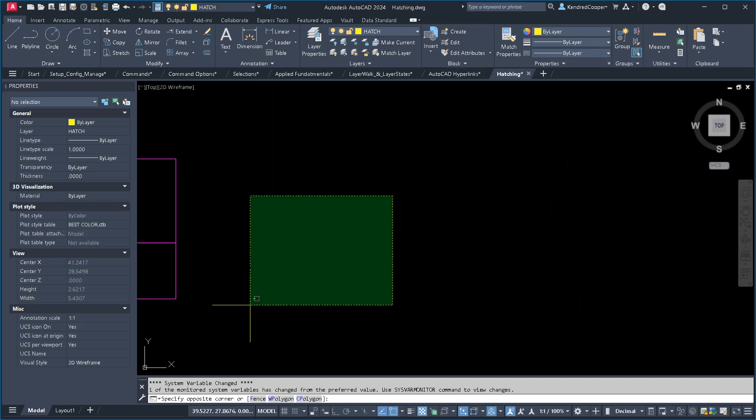Crossing window versus window select comes up a lot. So the difference between them is not only color, but how it's selected. Let me go back to the hatch one, that was a good one to show that. So, a crossing window or a window select: window select is left click, release, move to the right, whether you go up or down. That is a window select, and it has a blue highlight by default. Crossing select is left click, release, move to the left, whether you go up or down. The difference between these is what it selects.

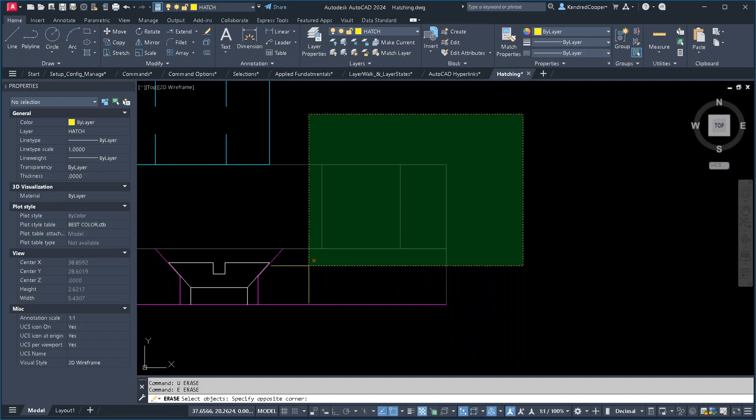So with a window select, the object has to be entirely within that window in order to be selected. So we've got 3 vertical lines there that are selected, but notice the horizontal lines are not being selected, and there's 1 vertical line at the bottom not being selected. So if I use erase, that's the only ones that it applies to. If I use a crossing window, now it's simply a matter of what does that window touch, and that's all it takes. Even the slightest little contact, and that item is selected. So now everything is gone.

P for previous, L for last, A for all. Erase is another good one for this. If I want to select everything and erase it, ALL gets rid of it. Start your command, bring that back, start your command, type in ALL, and it's all gone.

What about P for previous and L for last? What's the difference there? Well, here's the difference. I'm going to create a circle, and then I'm going to move that I-beam.

Now, if I do an E for erase and I press L, it's going to select the last object I created. That's the circle.

If I do E for erase and P for previous, it's going to select the last set of objects I selected. That's the I-beam. This can get tricky if you use the copy command. So now when I do E for erase and say L for last, you would think it's the circle. It's not. It's the bottom edge of that I-beam, because the copy command created that I-beam. So that can get a little tricky.

Quick select is a filtering option in the properties palette. So back here in the plant layout, if you're looking at the properties palette, the top right icon is your quick select. This allows you to look through the entire drawing for various objects that meet certain conditions. A good example: if you're looking for any line segments that have a length greater than, we'll say 144 inches, 12 feet, press enter and it will select all of the objects that fit that.

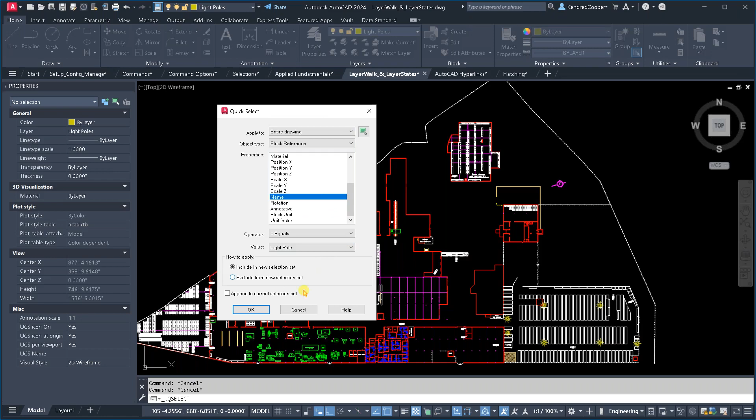The properties palette will tell you how many - there's 446. You could also use it to locate certain blocks. So let's look for a particular block reference that has a name equal to the light poles. How many light pole blocks do we have out here? Say okay. It puts a grip edit on all the light poles, and it tells me in the properties palette there are 7.

The last thing to look at is the different grip types that you get when you select items. So the top line segment is just that - a standard line segment. Whereas the bottom one is a polyline segment. Notice the different grips. The endpoint grips of both of these work identical, but the midpoint grip is a little bit different. With both of them, you can relocate the object by selecting that midpoint grip.

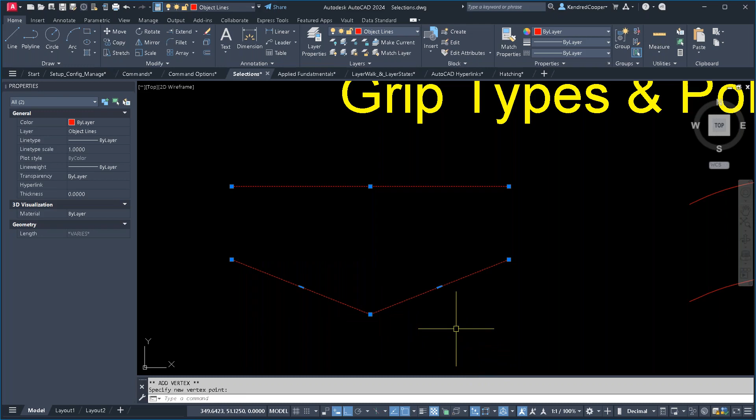But with the polyline, if you hover over it, you get a flyout menu where you can add that as a vertex and give it a corner condition. Same, you can also hover and convert it to an arc. Likewise, with a standard arc versus a polyline arc, I can take that midpoint grip and convert that polyline arc back to a line segment.

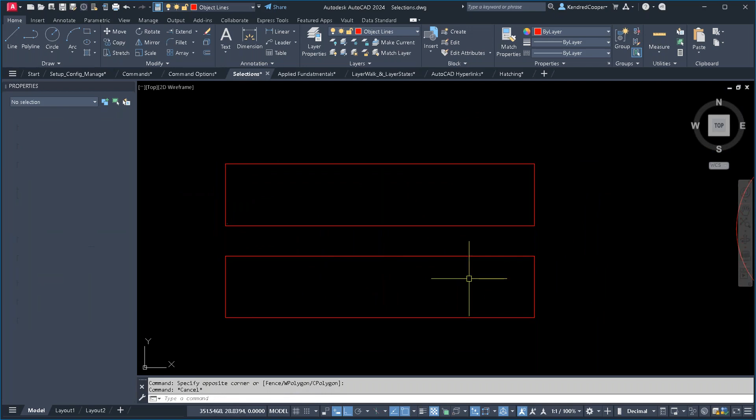Rectangular shapes - this is just a series of 4 standard line segments. This one is created using the rectangle command. The rectangle command creates a polyline object, and those same capabilities apply, where you can convert to vertexes, convert to arcs, change the locations of them, things like that.

Circle is a circle is a circle. You're only going to get 5 grips no matter what. There's no such thing as a polyline circle. You can have some polyline arcs that are closed up to where they look like a circle, but they will not have 5 grips.

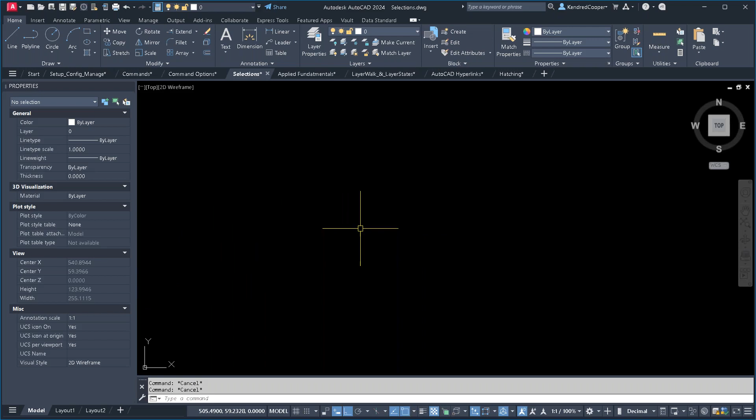Okay, so now we're going to get to a little bit of nostalgia real quick. This only applies to AutoCAD, and this is the only command in all of this that only applies to AutoCAD. First, let me switch over to a different colored theme to make it easier to see.

There's a command called Screenmenu. It used to be turned on by default. It's been turned off for a number of years, but you can kind of revive it. Use the command redefine, type in Screenmenu, it's reactivated. Now when I type in the Screenmenu command, it's an on-off switch - 0 is turned off, 1 is turned on, and I have my trusty old AutoCAD DOS Screenmenu. Again, this is just for nostalgia purposes. It's not kept up to date, so there's a lot of commands missing from this, but it has all the functionality of old school DOS interface. So if you're feeling nostalgic and want to go back to it, it's still there.

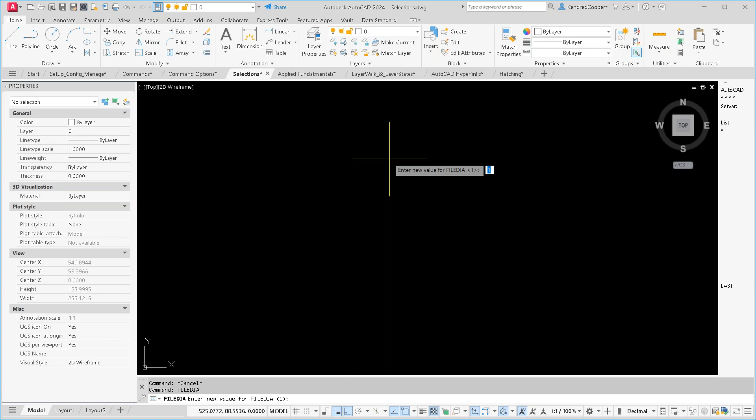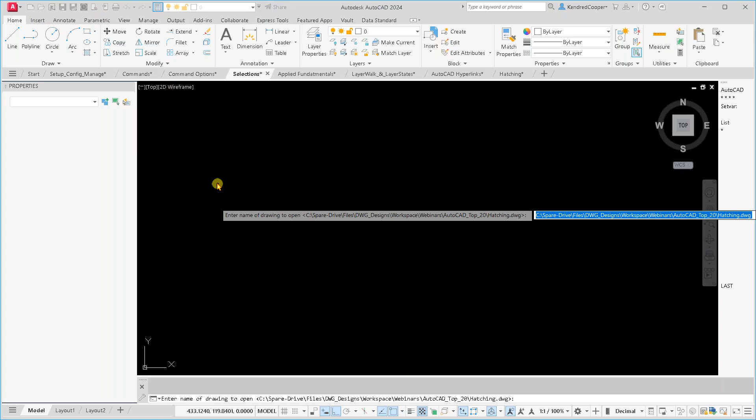A couple more commands. One that comes up quite a bit, and again I think this is related to antivirus and firewall settings, kind of changing things in the registry - there's a command called FILEDIA. What that controls is the display of dialog boxes like the open command, new, or save as. If that is set to 1, then your dialog boxes will display as such. If FILEDIA is set to 0, no dialog box gets displayed and it reverts back to a command line interface. So again, we've seen situations where antivirus and firewalls can sometimes mess with those settings.

And either change them or turn them off during an install. Real easy to get it back on. FILEDIA, set it to 1, brings back your dialog boxes.

And then the last little bit is in the CUI. So in here, you can come in and control a lot of commands and interfaces and command structures with AutoCAD. It's a big area to be poking around in, so be careful.

But one thing you can do - you've got a lot of drawings open, you're ready to get out of there for the day, and what do you do? Close, save, yes, save, yes, save. It's just monotonous. So instead of going through all that, you can make your own custom icon, and it will do it all for you.

I've created one called 5 o'clock. For that icon, the macro pulls up two commands. First command is save all. Second command is close all. So whether it's a fire alarm that somebody pulled, or it's 5 o'clock and you're ready to get out the door, all you got to do is come up here, click that drawing, walk away. All of them are being saved and closed as you're running out the building.

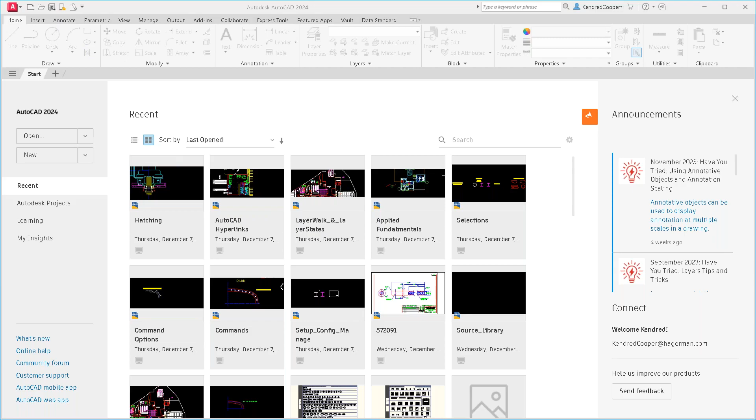And with that, I will open it back up for Q&A.

Dan, how's our Q&A poll window looking? Yeah, looking pretty good. I guess if anybody's got any other questions, I've been answering them as they've been coming in. If you got anything else, feel free to type it in now. Let's see here.